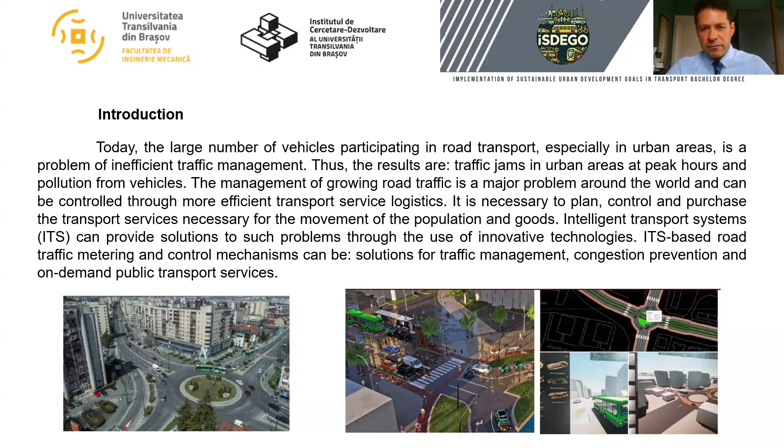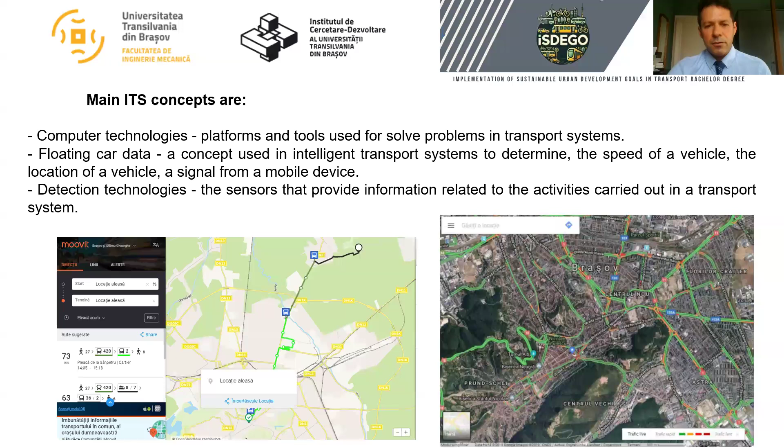The main ITS concepts are: computer technologies, the platforms and tools used to solve problems in transport systems; floating car data, the data from each vehicle connected to the grid and the system; and detection technologies, the sensors and everything about the infrastructure of the system.

The primary objectives of ITS are efficient and comfortable transport, safe and secure transport, and also cleaner transport with reduced noise pollution and air pollution, reducing CO2 when we do the calculus based on the most important documents we have in order to resolve these problems.

These ITS components in sustainable urban and rural strategies have specific needs depending on the type of city - whether it's a small city, a medium city, a large city, or a metropolis.

In order to make the right choices in implementation of ITS components, we need studies: traffic studies, impact studies, necessity studies, opportunity studies, sustainable urban mobility plans. For each of these kinds of studies, we need specific tools.

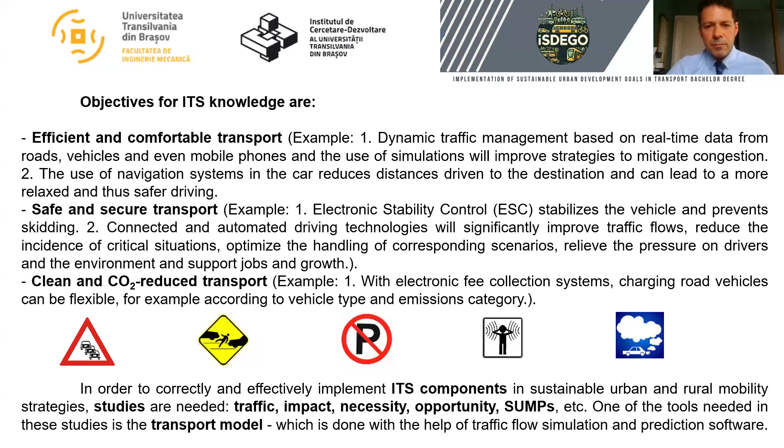For simulation software tools, we have three types of traffic simulation models: microscopic, macroscopic, and mesoscopic modeling. Each has different types of tools and ways to make the evaluation and simulation happen.

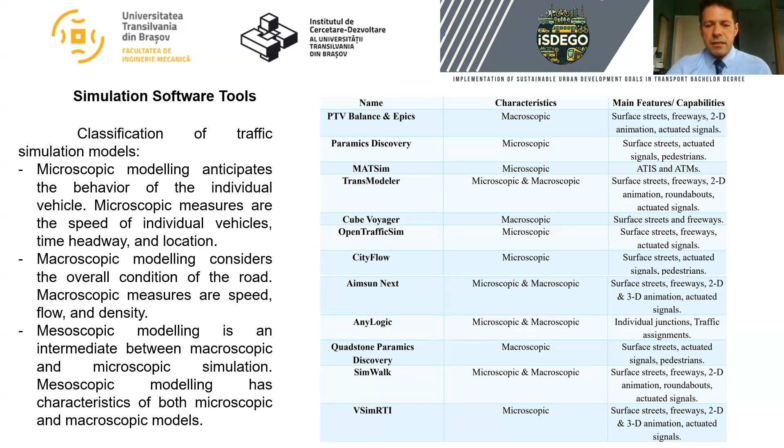We have a big diversity of softwares. I present two of them - the softwares that we use in our studies. The first one is named Synchro Plus and SimTraffic.

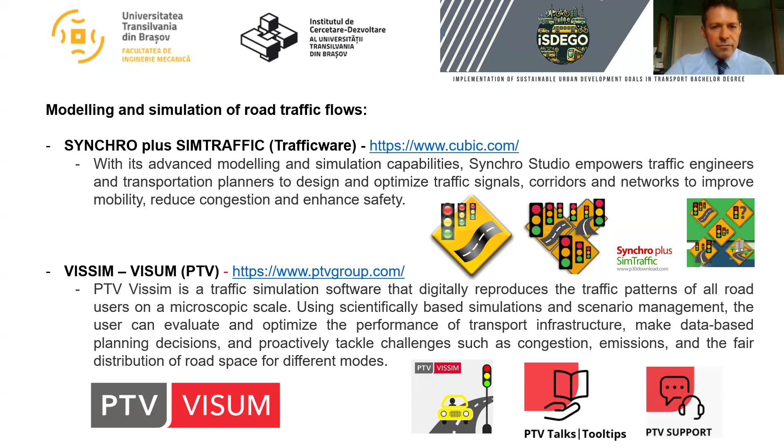I will explain - it has two components: one for designing the traffic network, and the other one needed to obtain results and make simulations. The second one is Vissim Visum from PTV. It's a tool most commonly used for SUMPs, and it's much more complex than Synchro or SimTraffic, but I will note the differences between them.

So Synchro has a network modeling part where we build the structure of the roads. We make the links, the junctions, the signals, the lanes for each road, the traffic flows, the data from the traffic flows, and the signals that can be changed in order to optimize the junctions, and also we make the traffic analysis.

For traffic animation, the SimTraffic component is an animation tool that shows traffic jams, also fast, slow, and stop animation over time to see what problems come from the infrastructure and the mobility of the flows. The 3D viewer converts the two-dimensional network to a 3D view.

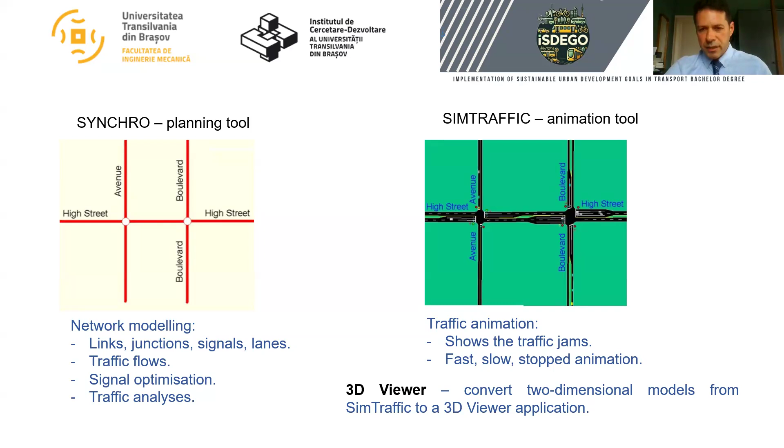For the network modeling, the objectives are coordinated junctions and independent junctions. You can analyze only one junction, or an entire route. We can make choices for traffic signs or traffic networks, and also analyze different types of junctions.

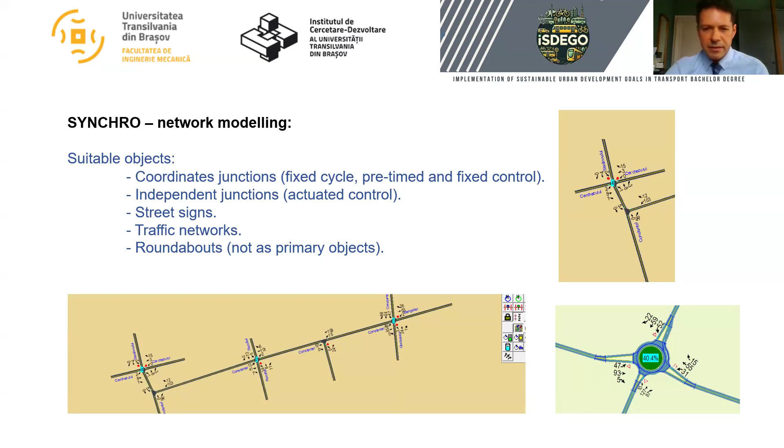For roundabouts, it's one specific problem. For traffic data, we can enter vehicles that go forward, turn right, and turn left. But for roundabouts, we can introduce turning at 180 degrees on the same road, so the movement goes to the left. This is the problem with Synchro and roundabouts.

In order to prepare the network model, it's mostly very simple. We can draw the network using the mouse, link the distances, and connect the junctions. We specify the junction geometry, number of lanes, distances, how the road goes, and the number of entrances.

Also, we can enter the data for the traffic flows. We can specify the signal control and make the signal timings, which is very important for the simulation. We can see the animation and see if something is not right.

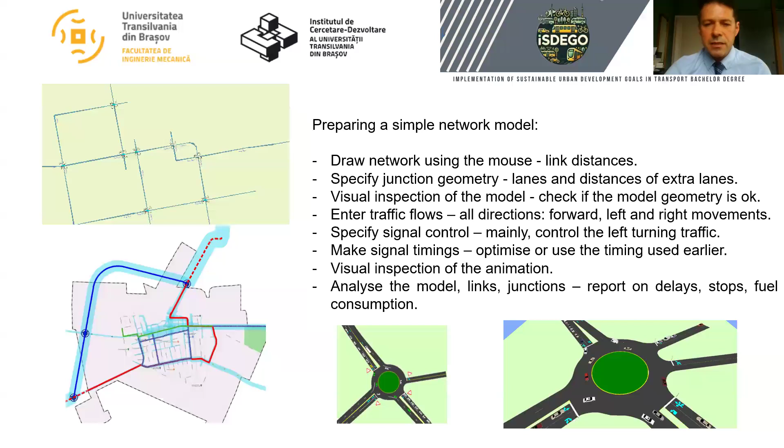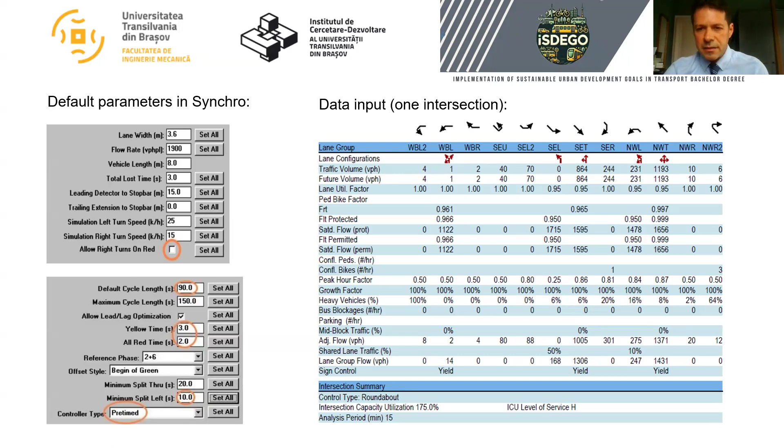In order to enter the data, it's a quite simple module. The interface is very friendly, and you can enter the data and see this chart on the right - the data input for one intersection - you can see it and modify if something is wrong in the input.

Afterwards, we have the results, and this is a sample result showing the level of service for the intersection, also the time losses for each lane and for each entrance in the intersection, also fuel consumption and several pollutants estimation.

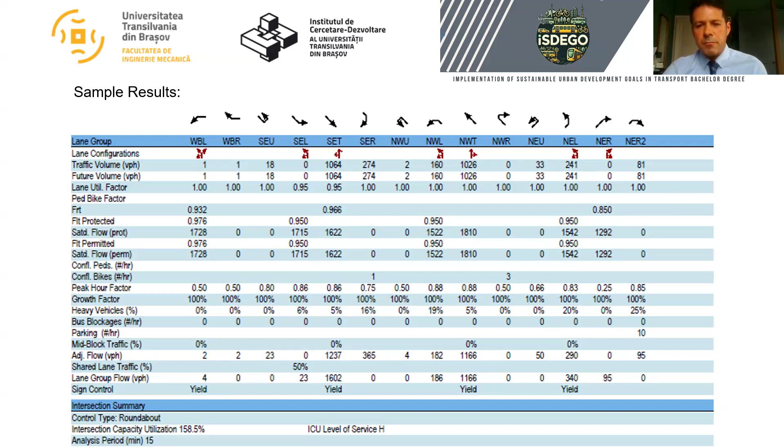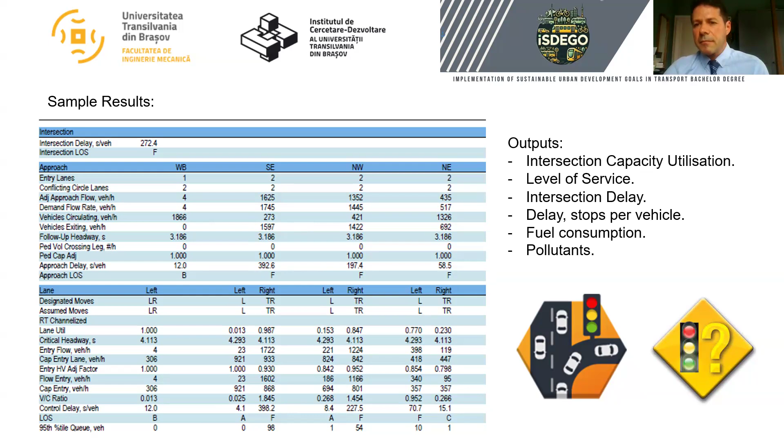Level of service is very important, but not the only specific parameter we analyze. Also the intersection delay, the number of stops for each vehicle, especially for roundabouts, and the impact on the environment. The 3D viewer converts the two-dimensional models from SimTraffic to a 3D viewer application, and you can see movies about how vehicles enter and exit the intersection, where the problems are, where the time losses are, and where the congestions are.

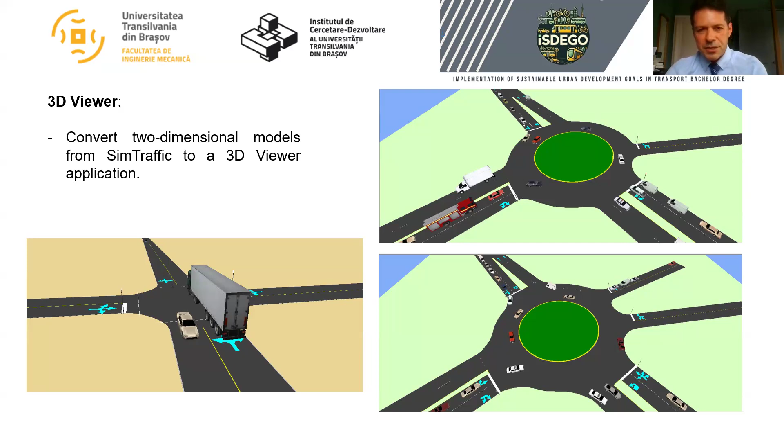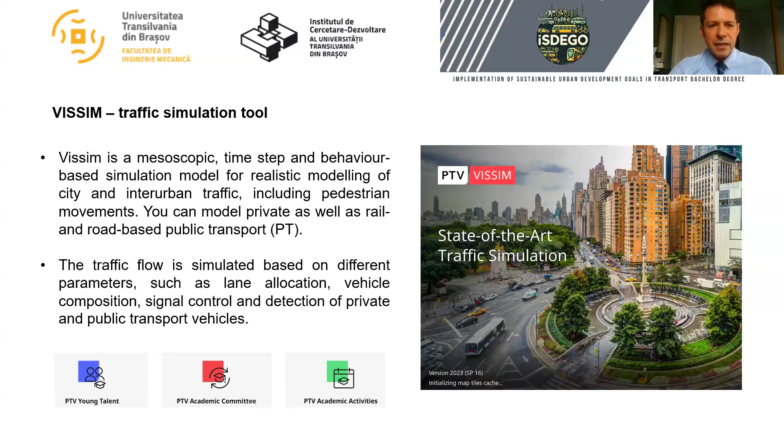The second one is Vissim. It's a tool, very popular, mostly in Europe. The difference between SimTraffic and Vissim is the complexity of the data you can enter in this software, and also the type of analysis. Also, the price of acquisition for this software is much bigger than Synchro.

So we have licenses for students only from 1 year ago, so we are starting to use this tool also. The presentation is from the tutorial, because we don't quite use it in our studies, because what you see in Synchro are results from studies that we have done in the last 10 years.

For PTV, we have junction layout comparison, roundabout versus signal control, multimodal services, transport development planning, capacity analysis, active traffic management - it's a very important tool for this software - public transport simulation, multimodal interchanges, and pedestrian movements. We can't make pedestrian movements and data in Synchro, but in PTV Vissim we can do this part.

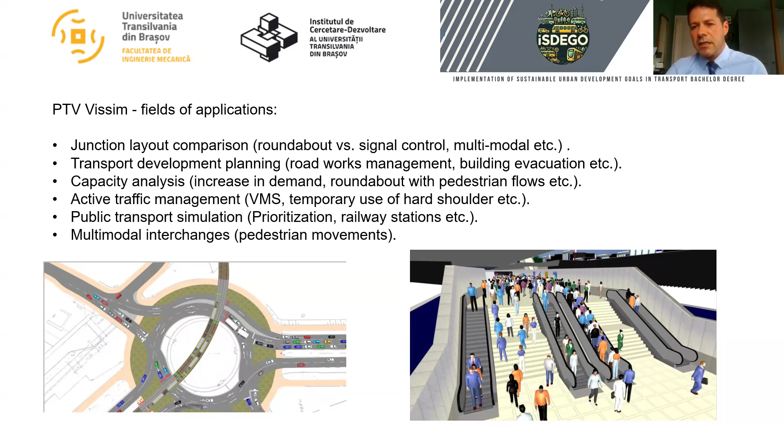So the graphical interface is more complex than SimTraffic. You can use it, but it's not very friendly - you have to study the documents, you have to have training lessons, because it's much more complex and not very friendly, unlike SimTraffic.

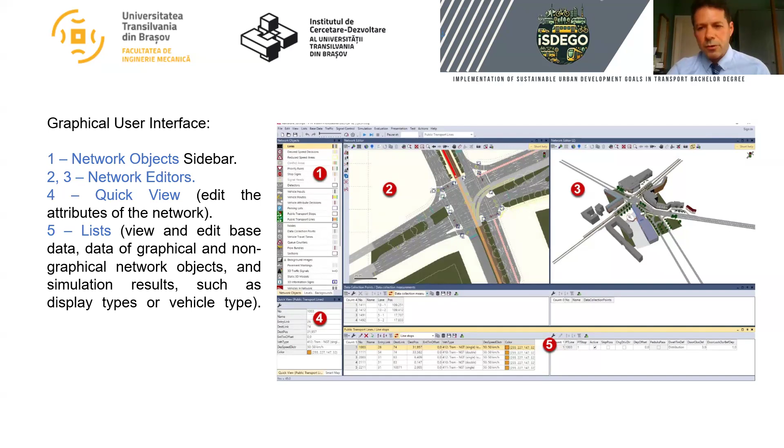So the network objects are in the sidebar, number 1, network editors in panels 2 and 3, quick view in panel 4 for the data that you input, and lists to view and edit base data of graphical and non-graphical network objects in panel number 5.

With VISSIM, we can make network modeling, import a base map. We can use maps from Google Maps or from any kind of GIS tool, Google Earth, or anything we can use. We can create links with several lanes from the GIS tools, and create connections between links.

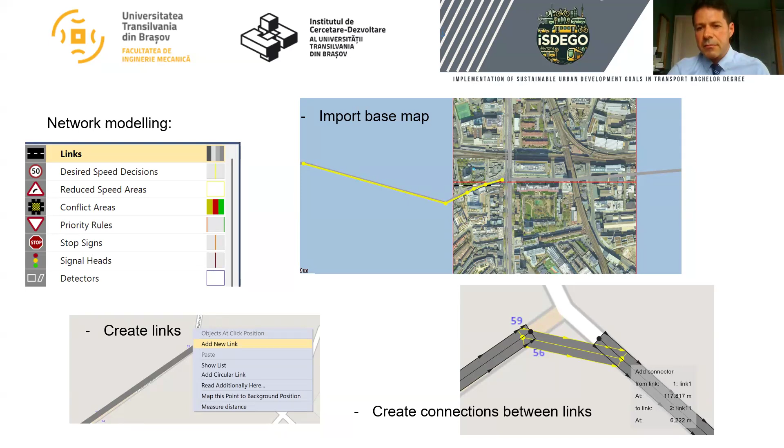For vehicle inputs, we can enter the traffic volumes, the vehicle routes, vehicle speed, and we can run a simulation and define the vehicle types. The types of vehicles are much more complex than in Synchro, but you have to be very careful when collecting the data.

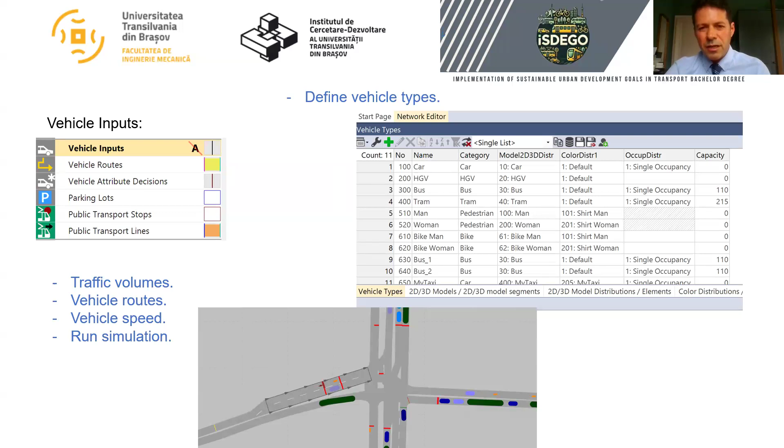But VISSIM also has a new tool that can use online and open source traffic flow data. PTV VISSIM can use data from Google Maps, for example, the number of vehicles on one route in one specific interval, so it's no longer needed to collect the data yourself.

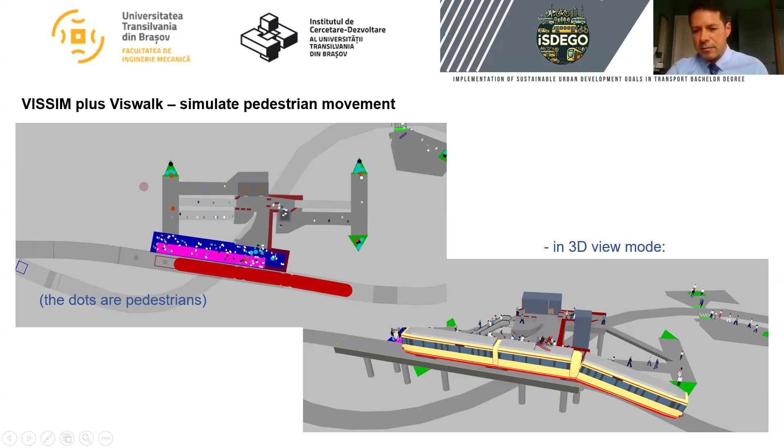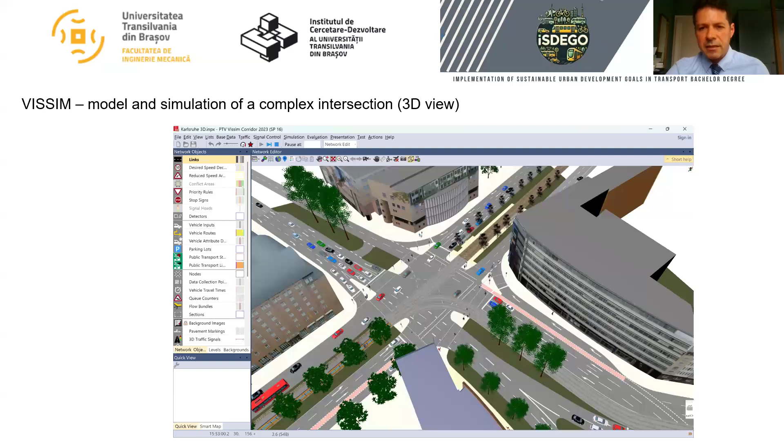Also, they have pedestrian movement simulation. Viswalk is the specific tool where you can see the pedestrians in 2D and 3D also, and how they enter and exit a transport vehicle. The model and simulation for a complex intersection is very good quality - it's a lot of data you can enter, but I repeat, it's not very friendly to use. You need a lot of time to learn and to use this tool correctly.

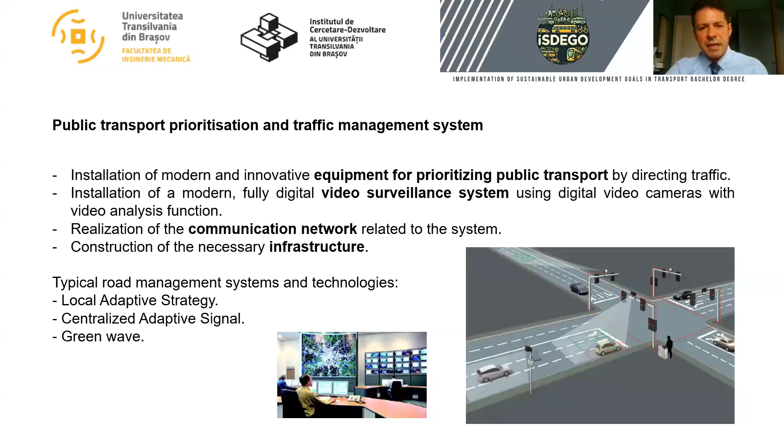They want to use equipment for prioritizing public transport, for video surveillance, also big communication network related to the system, and this is where the most problems appear, and also complete the infrastructure they already have. The last component is parking management in areas of public transport lanes, because the bus lane is next to the parking on the road. So they have a lot of conflicts, and they try to optimize the mobility and the parking strategy.

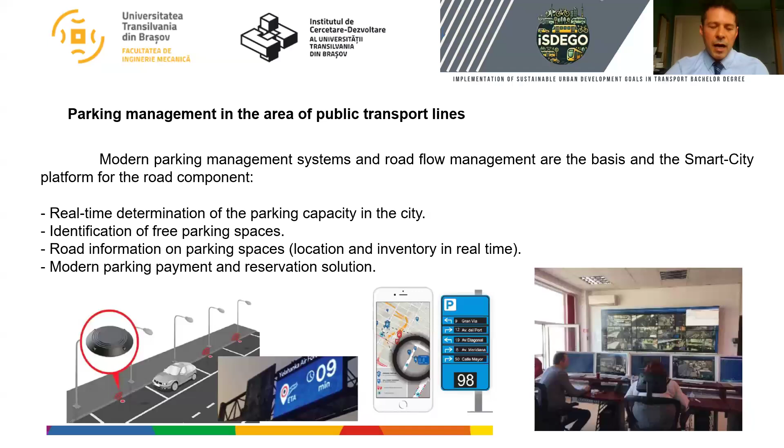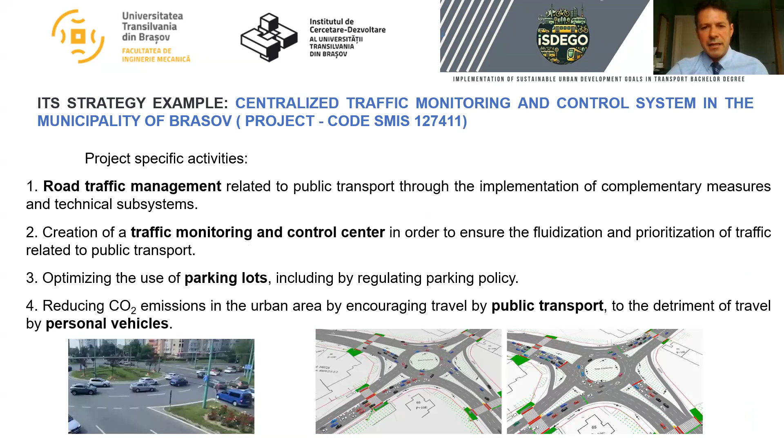These tools are integrated, and now they try different scenarios. So they also use the PTV VISUM simulation to make the right choices for these ITS components. Thank you very much, that was my presentation.